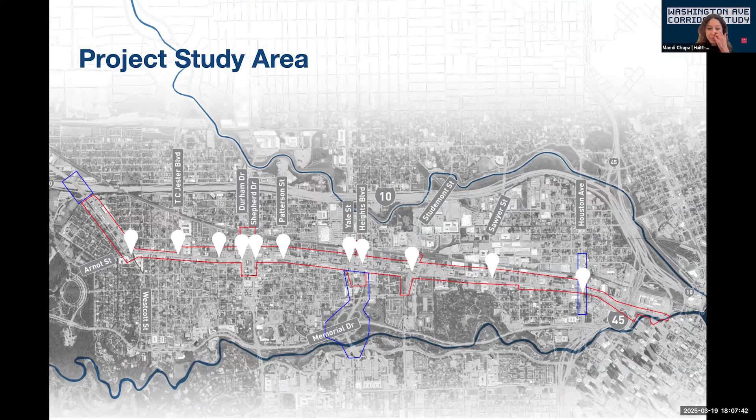As we talked about, this is our study area. Outlined in red is the western end, Washington and Westcott, coming down to the roundabout, and then heading east is Washington Avenue, paralleled just north by Center. All of the white dots are the 12 major intersections that Sarah will be talking to you about in a little more depth, but these are the intersections we've looked at closely.

So what is today's goal? The meeting is intended to get feedback from everyone here. We'll be presenting alternatives for you to say, this is my selected alternative. That's really the goal of today's meeting. And as Caroline was saying, we also want to understand from you how that pedestrian realm is laid out as well. Next slide.

And so what we've learned from this study so far, I'll walk you through some highlights to put this all into context.

The right-of-way of Washington is limited. You can see here it's mainly composed of two traffic lanes in each direction with a continuous turn lane for the majority of the corridor, except north of the right-of-way where things change a little bit. But you can see at its tightest, Washington Avenue is about 60 feet, and at its widest on the eastern end is 100-foot right-of-way, climbing all the way up to 160 on the western end.

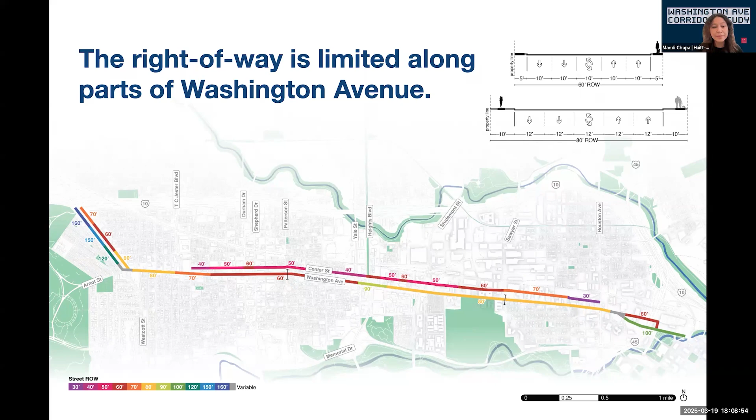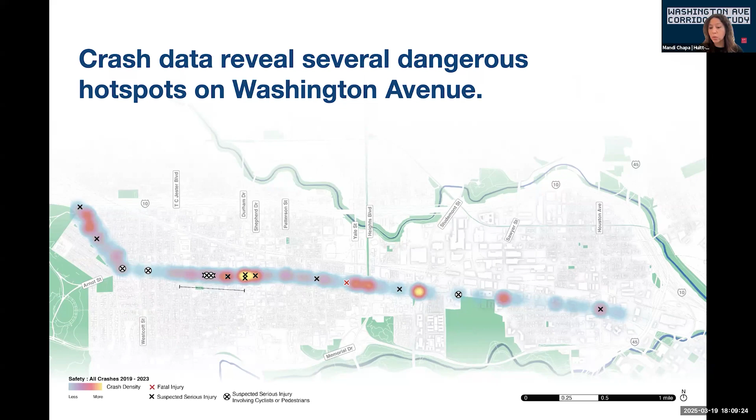Crash data tells us that there are serious and dangerous hotspots around Washington Avenue. The yellower spots are the most serious injuries and crashes, and then as they go into red and blue, it's less severe in the blue. You can see here there is quite a bit of suspected serious injury and one death that has happened along the corridor, at the major intersections we're looking at.

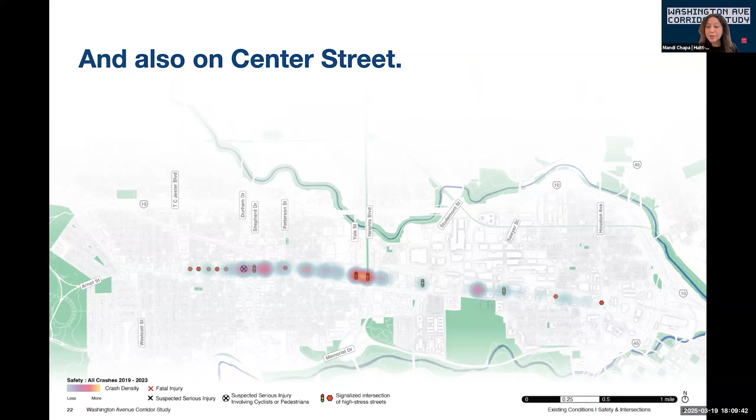The same goes for Center Street here. While not as severe, you can still see some yellow and red spots around the corridor, showing where seriousness has happened.

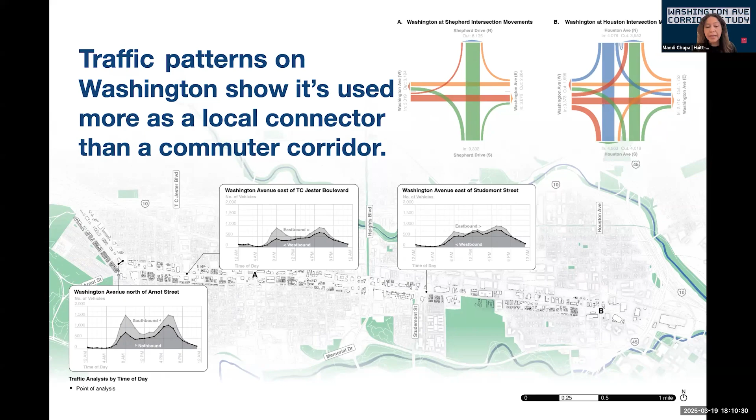Traffic patterns on Washington show it's used more as a local connector than as a commuter route. The diagrams in the upper right show that the thicker the line, the more traffic it carries. You'll notice the north-south lines being a lot thicker than the east-west lines, which is Washington Avenue itself. So a lot of cars are passing through and turning off of Washington more so than continuing the entire duration on it. As anticipated, we see peaks, with higher traffic in the mornings and evenings, and some increase at lunchtime.

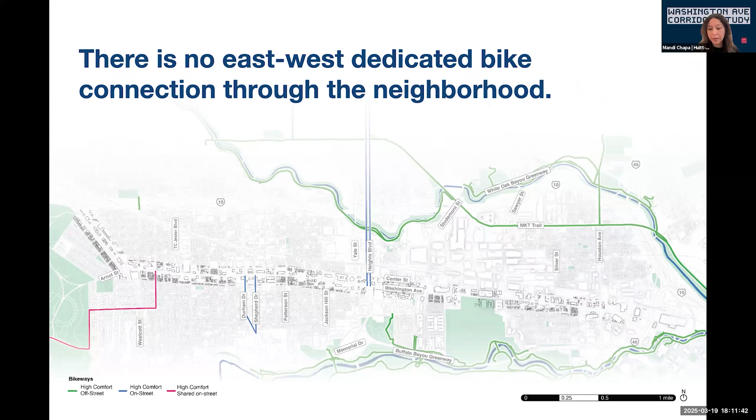When we looked at bikes, we've got really great off-street infrastructure to the north of us, and some great infrastructure to the south. The Buffalo Bayou trails connect it all on the eastern end, and then we've got some spots of on-street infrastructure on Durham and Shepherd and some on Heights. But for the most part, there's a huge gap in the center of the study area in bike infrastructure.

Crossing Washington Avenue is challenging, especially at locations where there is no signalized intersection. Everywhere you see a traffic signal is where we've got those major intersections identified, but you can see big gaps in between. When we look at Shepherd and Yale, we've got over 3,000 feet between intersections, and at the roundabout to the west, there are no traffic signals at all. This makes it a lot harder for people on foot or on bikes to cross these major streets.

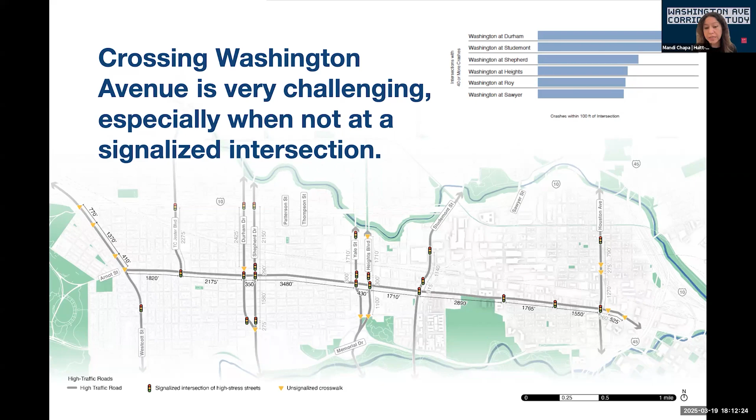We had a round one engagement already last year. We engaged the community via public meetings, and we also went to Super Neighborhood 22, where we presented a lot of the different cross sections that ultimately landed at the alternatives we will be presenting to you today.

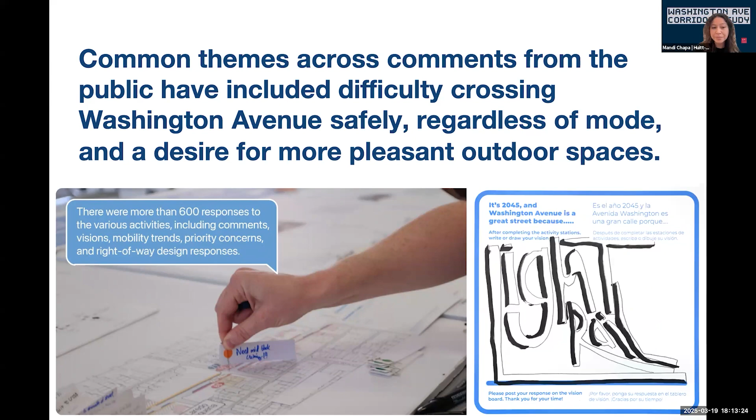Here are some of the things we heard. We heard a lot of people hoping that these alternatives identify safety and think about other modes, and there's a desire for more outdoor space and hangout space along the corridor. We collected 600 responses via in-person meetings and through the website, and all prior input was considered in developing the alternatives you'll see here today.

I'll hand it over to Sara to talk a little bit about intersections.

I'm going to spend a little time talking about some of the common characteristics that carry through all of the alternatives, to set the stage before we get into the different options available for your feedback today. These include operational and intersection improvements, being mindful of the different modes moving through those areas, maintaining access for emergency services, and looking at opportunities for additional signalized intersections to facilitate safe crossings.

There will also be consideration of parking management along the corridor, and timing signals to provide safe and comfortable crossing opportunities for individuals of all abilities and ages. Access management will be considered to consolidate driveways and minimize conflict points, maintaining ADA accessibility, and considering wayfinding and parking signs, as well as quality infrastructure including pavement, drainage, lighting, and utility treatments.

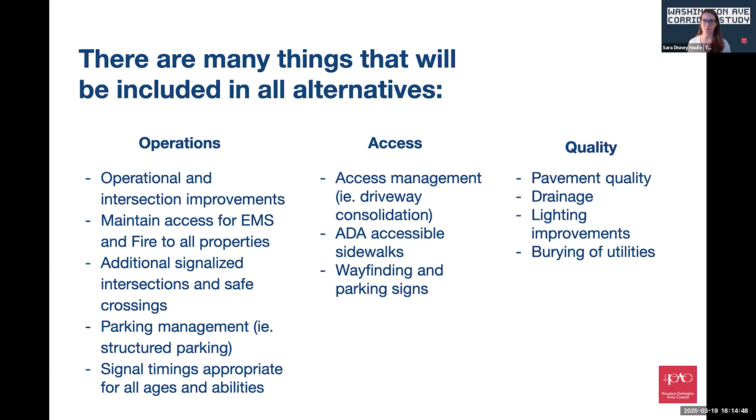So as Mandi mentioned, there are selected intersections that we analyzed specifically. And we began by identifying existing turning movement counts at these intersections during the morning and evening peak hours when rush hour traffic is at its highest.

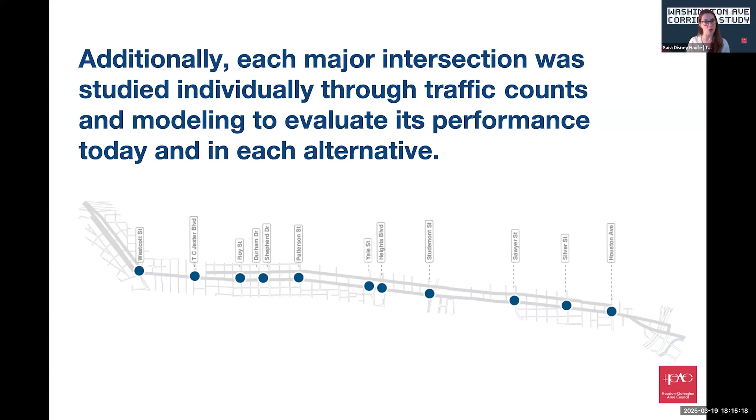We prepared traffic engineering models to evaluate the performance today under a future baseline or no-change condition, and then through each alternative. Those traffic operations were modeled to a future year of 2045, which we established together with HGAC so that we can get a long-term view of what the redesign of the Washington Avenue corridor may look like, and provide comfort that what's being constructed will be resilient for some time into the future, providing that long view for this plan.

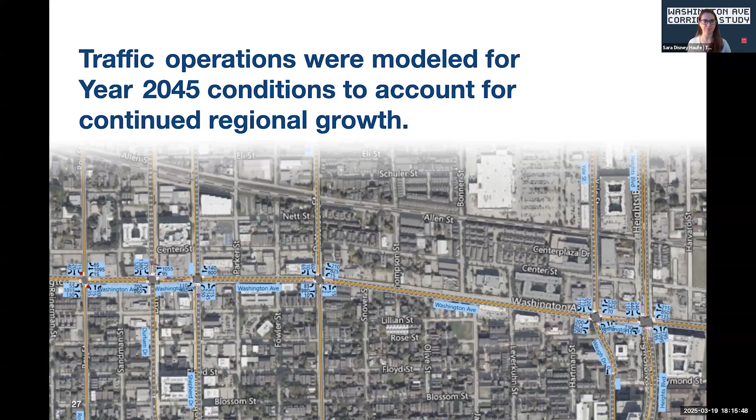As Mandi mentioned, safety is paramount for this corridor, given the high crash condition currently along Washington Avenue. So we looked at existing data from reliable sources to inform our work. Specifically, we looked at the Crash Modification Factor, or CMF, Clearinghouse, a database provided by the Federal Highway Administration based on research studies that provide information on how different design elements can increase or decrease traffic crashes, pedestrian crashes, and bike crashes along a corridor.

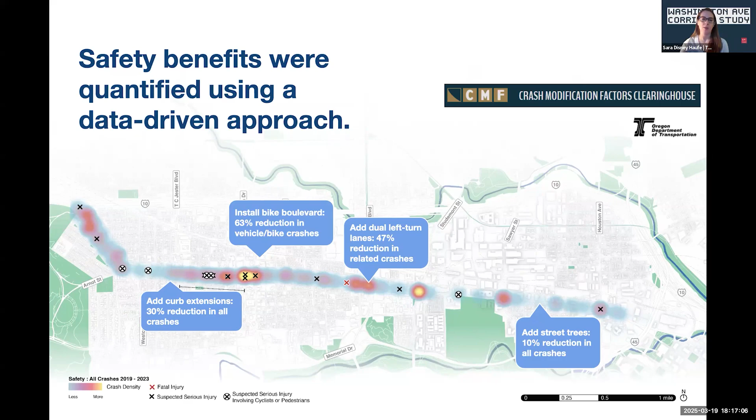We also looked at the Oregon Department of Transportation CMF database. Oregon DOT has their own research fund, funded by their Highway Safety Improvement Program. Their program has been so robust that their information supplements and is complementary to the Crash Modification Factor Clearinghouse, so much so that it's actually hosted on the Federal Highway Administration's website. So those are two very reliable sources we look to in understanding how different design elements for all of these alternatives may influence safety.

Finally, the third technical metric we're looking at relates to level of comfort, or what we call level of traffic stress for cyclists. That's a rating from 4 to 1, ranging from least comfortable to most comfortable, informed by three factors: the posted or prevailing speed of traffic on a roadway, the volume of traffic on that roadway, and the type of bicycle facility. This allows us to rate the level of stress for cyclists along both Washington Avenue and Center Street in each alternative.

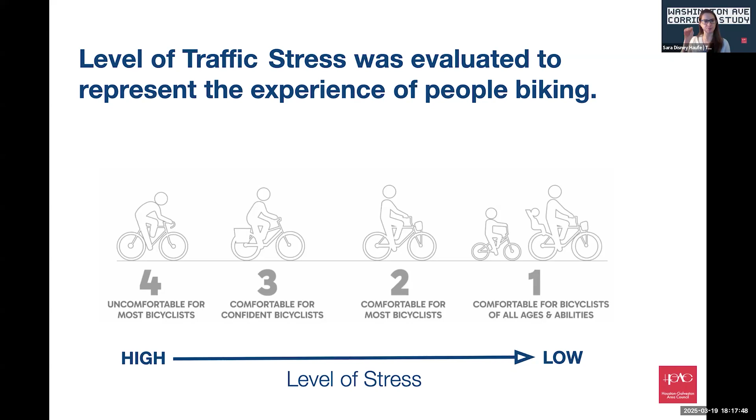As part of our evaluation modeling the future baseline condition in that 2045 design year I mentioned, we saw opportunities to integrate common best practices that we often apply in traffic engineering to maximize functionality and safety along the corridor.

The first example is how there are multiple intersections along our study corridor with large green spaces in the medians. If we shift that green space from the median to the edges of the street, we could reduce the size of the intersections. All other variables held equal, a smaller intersection is safer than a larger one. This also unlocks opportunities: reduced crash exposure by shortening the travel distance through the intersection, true whether driving, biking, or walking, and we can increase space along the edges of the street for sidewalks, landscaping, and other amenities without directly reducing vehicular capacity.

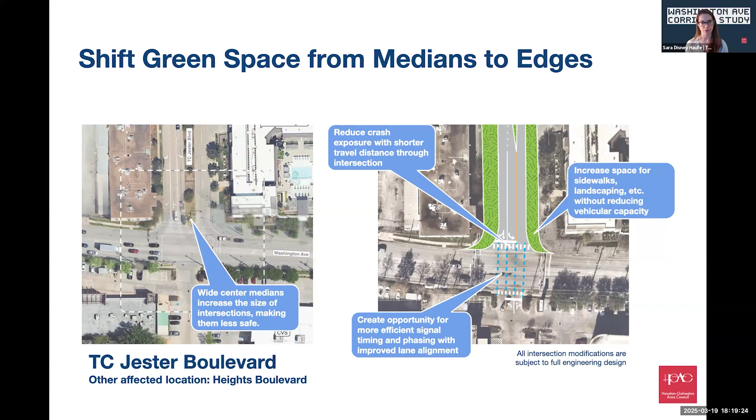In this particular example, TC Jester aligns opposite a small private driveway, not directly across. At this intersection, TC Jester gets a green light at a different time than the private driveway on the south, meaning a longer red light on Washington. If we create alignment across the intersection, we can improve the efficiency of the signal timings and reduce delay for drivers by allowing those green lights to happen at the same time.

Moving to our next intersection treatment, there are opportunities to consolidate what we're calling excess channelization. That may relate to turn lanes that aren't necessary based on traffic volume and capacity needs, but also redundant parallel roadways where we're increasing points of conflict, interrupting the pedestrian realm more often, and potentially enabling drivers to take turns at a higher rate of speed.

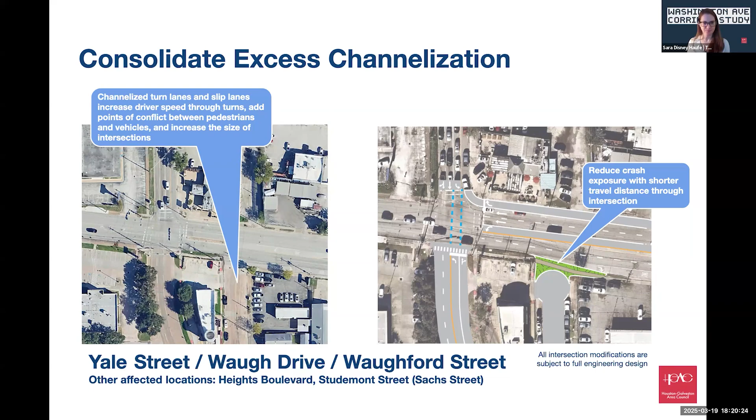At Heights, we see an opportunity to add an additional left turn lane, which is something we typically look at when we have very heavy left turn volumes. Maybe some of you have sat in long queues waiting to turn left from Heights onto Washington, something we observe in our existing condition, and we expect that would be exacerbated as traffic grows into the future. By adding this additional capacity, we can reduce the impact of those left turn lanes on the rest of the intersection, since they would otherwise queue back and block the through lanes. We can also better balance how the green time is spread around at this intersection and create better functionality overall.

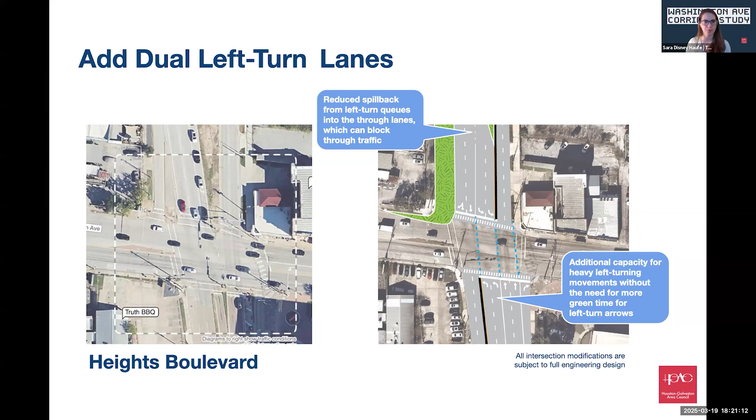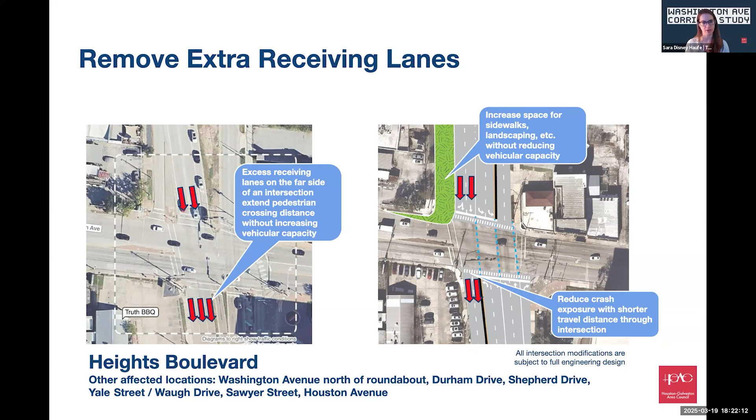Then in terms of signals, there are a few ways we can make tweaks to the signalized intersections along the corridor. For those that already exist, we may look at adding new left turn arrows where they're needed, or at TC Jester, perhaps changing the phasing, switching from a turn-on-arrow-only to, if we can reduce the size of the intersection and make it safer, allowing them to also turn on a standard green light. That's something we're looking at to improve delay for drivers.

And then at Patterson, we would expect that this intersection would warrant a signal. I've seen in the chat people mention a potential bike lane improvement along Patterson that has been planned in the past. This would create a better crossing opportunity for drivers, cyclists, and pedestrians at this location by giving them the security of a green light or a pedestrian walk phase.

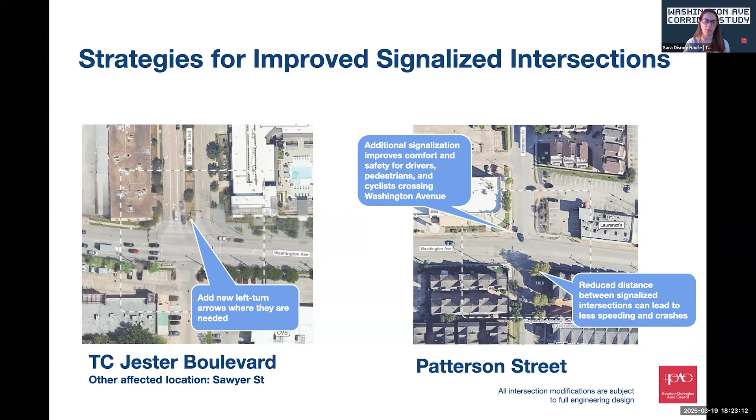In terms of potential outcomes, it's worth saying that each of these treatments work in tandem, they overlap with each other. To highlight some outcomes we might see by integrating these, based on results coming out of our initial traffic modeling already: where we add a new left turn arrow at Washington and Sawyer, we see the left turn delay go down by up to 25%, so you'd wait about 25% less time to make that left turn onto Sawyer. Then at TC Jester, with the reduced intersection size and the other treatments I mentioned, we could reduce vehicular delay up to 19%, and also improve the volume to capacity ratio, which measures how much traffic is trying to use the street relative to how much capacity it can offer. In short, it means improving overall operations for drivers.

From a safety standpoint, if we can reduce pedestrian crossing distance, the CMF clearinghouse tells us we could see reductions of 30% in crashes related to pedestrian-vehicle interactions. I do want to note that if we shift from a left-turn-arrow-only to left turn when there's an arrow and also turning on just a green ball, there can be an increase in crashes. So we want to do that very mindfully, thinking about how we're reducing the intersection footprint and making sure it's done safely. But installing dual left turn lanes has a 47% reduction in crashes on average based on research. So these are all things we're thinking about as we move through the alternatives.

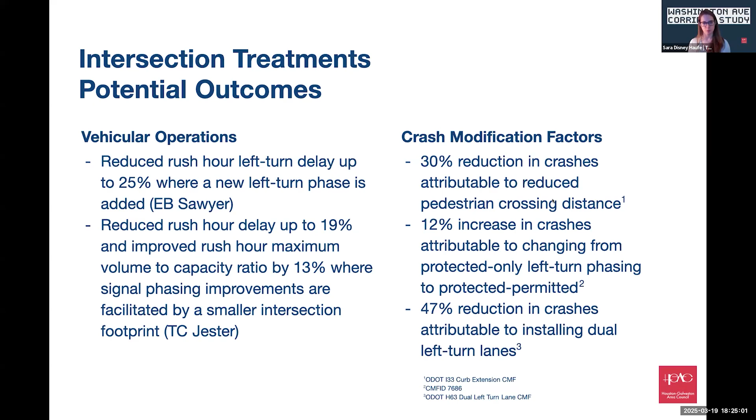So we want to walk you through the alternatives we have for what Washington Avenue could look like, and give you a chance to weigh in on which you think are the best. As you'll see, there's a wide range of options we're showing you. All of these came out of public input in the first round, things people at our public meeting said they wanted to see considered on this corridor. All of them have very different implications because of that limited right-of-way Mandy was talking about. There's only so much we can fit.

All of these include all the modes of transportation we're considering, but they give them different amounts of space. We'll go into more detail on crossings, medians, openings, driveways, and parking in the next phase. So really what we're talking about today is how that space is typically allocated.

Alternative A, like all the alternatives, would involve repaving the entire street, creating accessible sidewalks, and continuing to run frequent transit on the street. In this alternative, we make two traffic lanes in each direction, 12 feet wide, along the full length of Washington. There are some stretches where lanes are narrower today, so this would widen them in places and keep them the same in others. There's a couple of short stretches where lanes are a bit wider than this, but generally it's 12-foot traffic lanes along the entire length of the street.

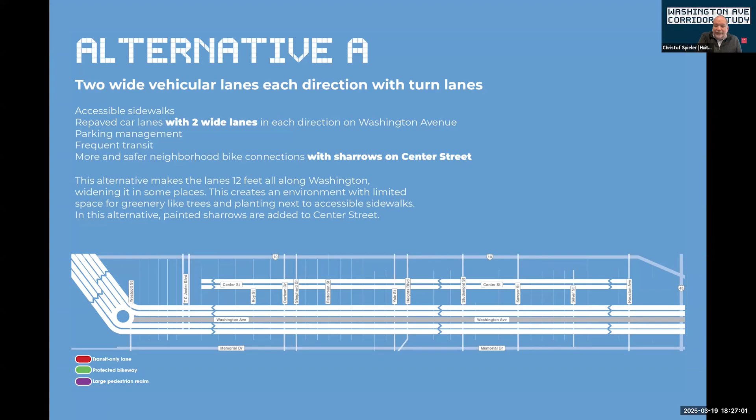For bikes, we're doing painted sharrows on Center Street to encourage bicyclists to ride there. So here you can see what that looks like: two traffic lanes in each direction, center turn lanes, and sharrows on Center Street. In terms of pedestrian space, this goes down as low as about 6 feet on both sides of the street. Here's a little feeling of what that might feel like at the intersection of Heights and Washington.

Alternative B has the same lane counts as alternative A, but narrower lanes. Those narrower lanes give us a little more room in the pedestrian realm, so we've got more space for sidewalks and street trees than in alternative A. These lanes are pretty similar to the current condition, but a bit narrower than on many stretches of Washington today.

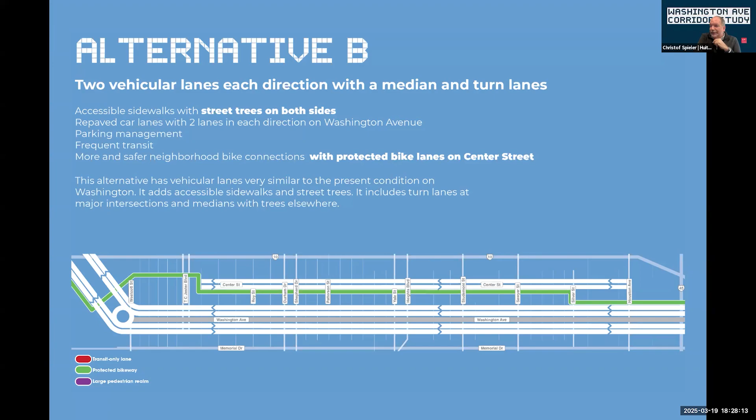What we also do in this one is create a bikeway along Center Street. Here you can see what that looks like: instead of 12-foot travel lanes, we have an 11 and a 10. We still have that median turn lane, and we get a little more space back of curb. On Center Street, we have one lane in each direction plus a bikeway. Here's a little feeling of what that feels like, with a bit more space in the sidewalk compared to alternative A.

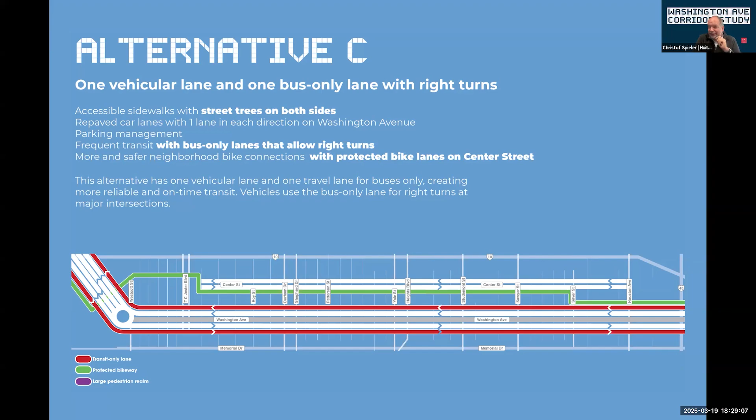Alternative C. Now we're starting to think of different ways to use the lanes on Washington. Here the outside lane becomes a bus-only lane, still used by other vehicles at intersections to make right turns, and obviously vehicles pulling in and out of driveways use that lane too. But in terms of through traffic, it's reserved for buses. Other than that, the geometry looks very similar to alternative B. You can still see those center turn lanes, but the lanes are allocated differently, with a traffic lane and a bus lane in each direction.

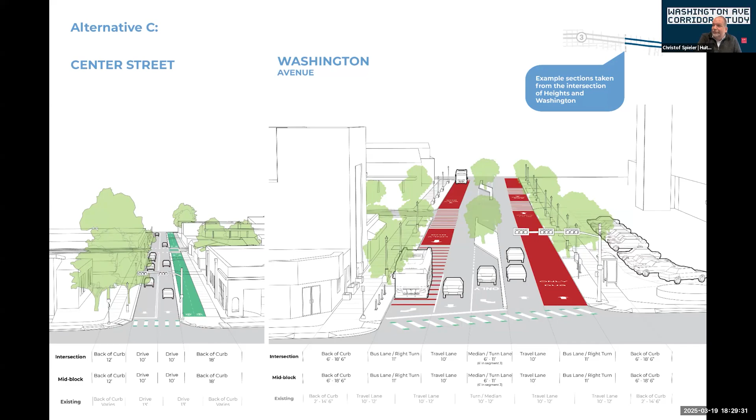Center Street has a two-way bikeway and one lane in each direction. Here's a feeling of what that looks like, very much like alternative B, except for the bus in the curb lane right there.

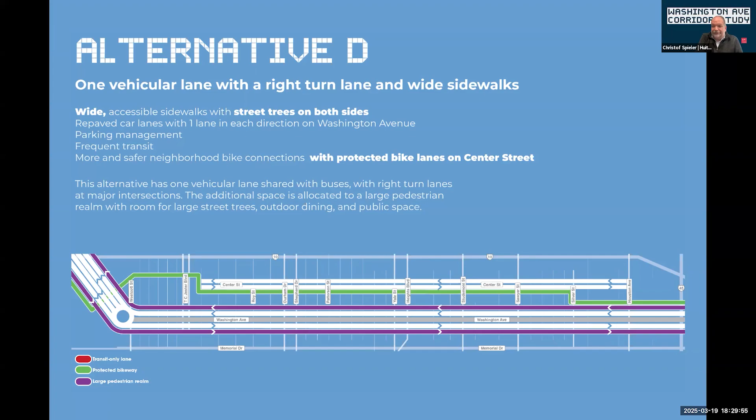Alternative D allocates space differently. Instead of two traffic lanes in each direction, this has one traffic lane in each direction with right turn lanes at intersections. This allows us to widen the sidewalks in between intersections, up to about 28 feet, allowing for a lot of green space and a much more generous pedestrian realm. At the intersections, the sidewalk narrows to allow those turn lanes, so it looks more like alternatives B and C there.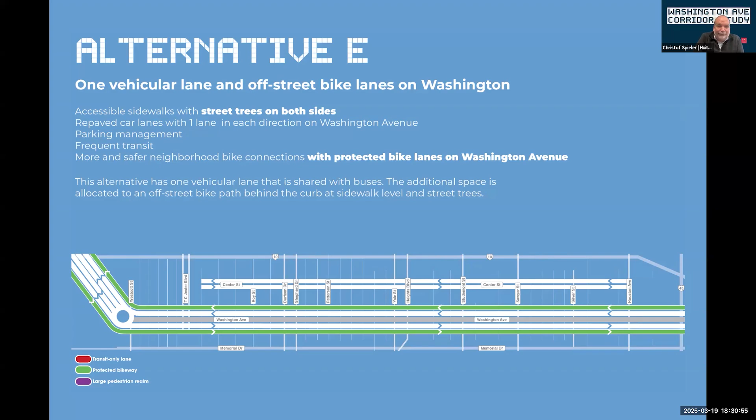Alternative E, instead of taking that space for wider sidewalks, we take that space in order to create more space for bike lanes. So rather than having bikes on Center Street, we have bikes on Washington themselves. Here you can see what that looks like: bike lanes on both sides of the street with one traffic lane in each direction and a center turn lane.

In some instances, space permitting, we may also add right turn lanes to this, but there is not space for that the whole way along. That means that this alternative has more traffic congestion than alternative D does because of that lack of right turn lanes at some of those intersections.

Here's alternative E. You can see what we're proposing here is the bike lanes at sidewalk level alongside the sidewalk. So the bikes would not be in the sidewalk, but they would be behind the curb to separate them from cars, with the ability to do landscaping around that lane.

Alternative F. This alternative changes along the length of Washington. From Heights Boulevard to the west, this alternative has two lanes in each direction and looks very much like alternative B in terms of lane dimensions and everything else.

But between Heights Boulevard and downtown, this alternative drops in center running light rail. One traffic lane in each direction, one track in each direction, and light rail stations in the median. It also provides that bikeway on Center Street.

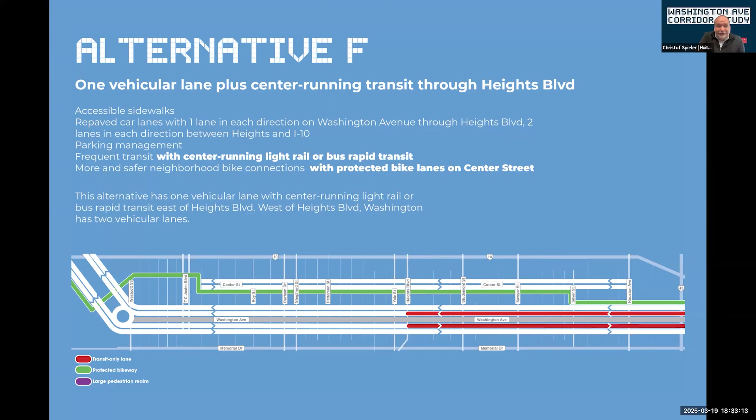Alternatively, instead of center running light rail, this could also be bus rapid transit. Here's what that looks like. You will see the light rail tracks in the center, and that center station platform. In this case, since we're looking at Heights Boulevard, you're actually seeing the place where the tracks end. We would thus continue bus service on the street, but that bus might take an alternate route from Heights Boulevard on into downtown with a transfer point at this location.

Alternative F, giving you a feeling of what that feels like with the light rail in the center of the street. And finally, alternative G.

In this case, we are adding light rail to the street along its entire length. This could be a continuation of green and purple lines in downtown, and on the west end, it would likely continue on to Northwest Transit Center.

What this means, though, is that we have one traffic lane in both directions along the full length of the corridor. Also, because the corridor gets significantly narrower on the west end, this would require some property acquisition in order to fit stations and at some intersections. So this is the only alternative we are showing that does not fit within the current right-of-way.

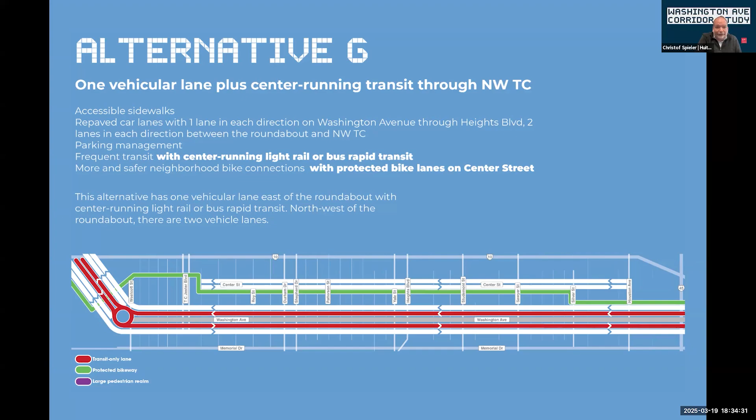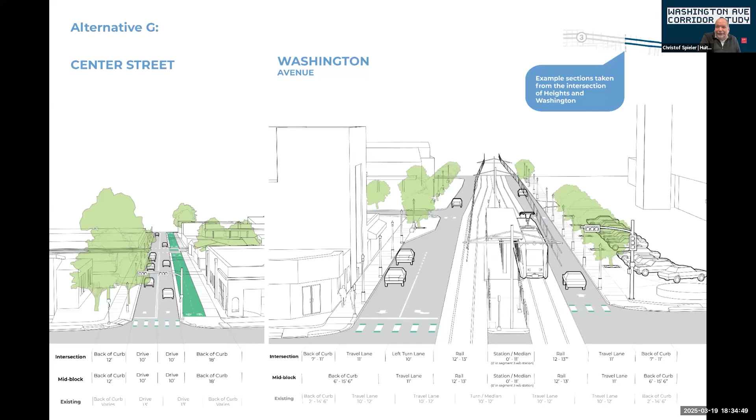Here's a little bit of a look at what that looks like. It is similar in that you have light rail in the center with station platforms. Wherever we have an intersection, we need a turn lane to allow for left turns at a signalized intersection. You will only be able to cross the tracks at those signalized intersections.

Existing conditions and a little feel of what that would feel like in the street. So these are 7 very different design options. We'll give you a chance to ask us questions, which you already are doing, and answer your questions in just a little bit. But we also wanted to think about what the implications are of these before we do this.

Because if you look at the back of curb space, everything between the curb and the property line, which is where the sidewalk fits, which is where landscaping fits, which is on-street dining and other uses of that space, there is a great deal of variation here. We're as narrow as 6 feet, and we're as wide as 28.5 feet. And there's a lot of things that could be done with that space.

So I want to turn it over to Lionheart to talk about that pedestrian realm. Okay, great.

Christof mentioned how much needs to go on behind the curb. A few of those things are entrances into buildings and adjacent patios and plaza spaces, sidewalks to connect people from parking to the buildings, and planted areas.

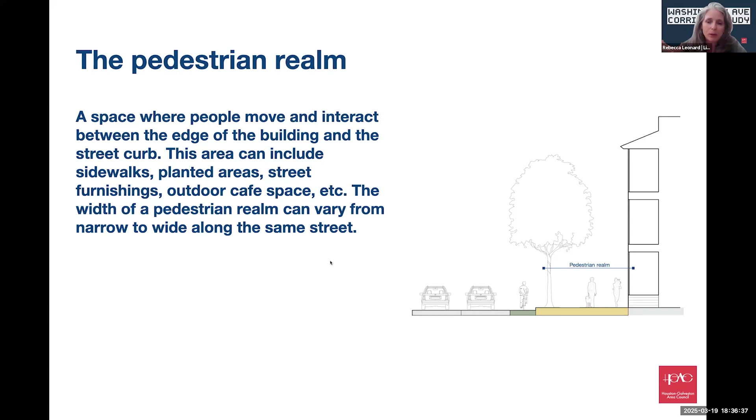We find that people walk quite a bit more when they have some shade. Also street furnishings, including waste bins and benches for people to rest along their path. In some cases where you have the luxury of additional space, we like to allow some of the activity inside buildings to flow out into the pedestrian realm in the form of outdoor cafe space or outdoor displays. So there's a lot that can go on behind the curb, and certainly in an active commercial corridor like Washington Avenue, there will be some demand for these things as we move forward.

Next slide. So these are a few of the things that we plan to achieve with the pedestrian realm. What we hear from you today will tell us how well we can achieve some of these things.

Safe distance from vehicles is really important. Making sure that as you're a pedestrian and you're unprotected, you still feel safe, and sometimes the way to get that is from distance.

Facilitating stopping and transitioning from one mode to the next. That could be around a bus stop, it could be around bike racks, and Ubers pull up, people get out and try to access the businesses. So making space for that in the pedestrian realm.

Supporting the local businesses and making sure they have what they need to thrive and have that clear access to their buildings. ADA compliance is essential on a streetscape in today's world, and there are many places out there today that don't really meet current ADA requirements. So it really needs to be a streetscape that's convenient and inclusive for all users, various modes, but also meeting and achieving the ADA standards, and improving connectivity around the intersections, making it clear how every mode navigates around an intersection.

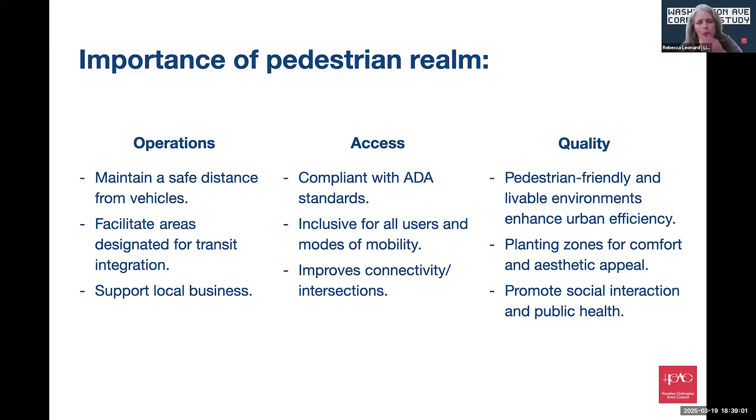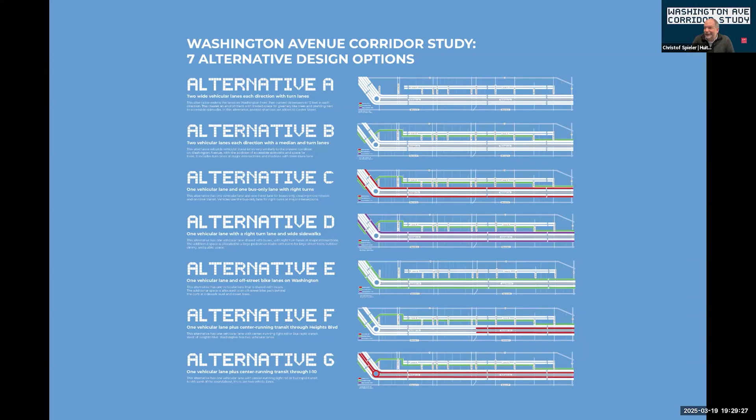With that, we want to get to the heart of the issue, which is that there are 7 different design options, and we want to hear what you think across that whole spectrum of options.